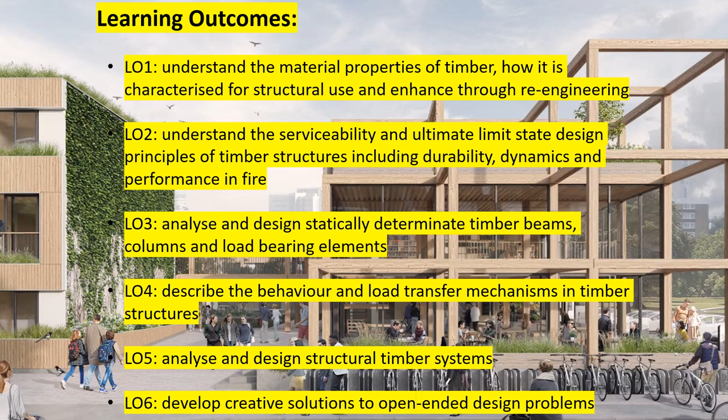Be capable of analysing and designing statically determinate beams, columns and load-bearing elements. Describe the behaviour and load transfer mechanisms in timber structures, and analyse and design structural timber systems, as well as develop creative solutions for open-ended design problems.

There's a full schedule in front of us. Please check your timetables if you are attending class with respect to where the room is. We have a range of individuals delivering over the course of the coming weeks. This module is normally team taught. In this instance, Bernardino is being replaced by Andrew Livingston for weeks 4 and 5, but fundamentally all the content will be covered.

We'll explore the different varying systems, connections, etc., and we'll also expand upon this through case study analysis. So it's a really intense but wide-ranging knowledge that you'll get from this with regards to timber engineering.

In terms of assessment, we normally have an exam as part of this, a coursework and exam, but what we're doing now is having 2 courseworks at 50% each. The first is on truss failure in week 8, and the second is a series of tailored questions distributed near the end of the schedule for you to undertake in your own time. Everyone will have questions tailored to them, so everyone will have different answers to provide.

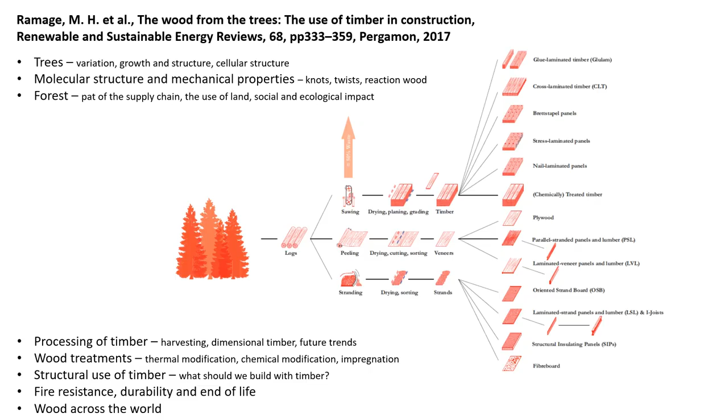So it provides a nice wide-reaching body of information. I would encourage you to read that, because it will help you understand timber as a resource through the course of this lecture and our course series.

There's a series of other publications available as well, including my most recent publication - or one of my most recent publications - the second edition of my book, published via TRADA, 'Offsite and Industrialised Timber Construction'.

And a lot of the content that populates this course will be extrapolated from that, so a useful textbook indeed. And of course, there's journal papers in the mix here as well, covering both timber engineering, but also things like collaborative frameworks to encourage the utilisation of timber.

A very recent publication, I think it's very timely, that's come out from the structural engineers is 'Can MMC Help Save the Planet?' Timber and natural materials are very much included in this. I would encourage you to download this publication, I understand it's free, and it looks at the impact of embodied energy and embodied carbon in delivery of the built environment, which is critical.

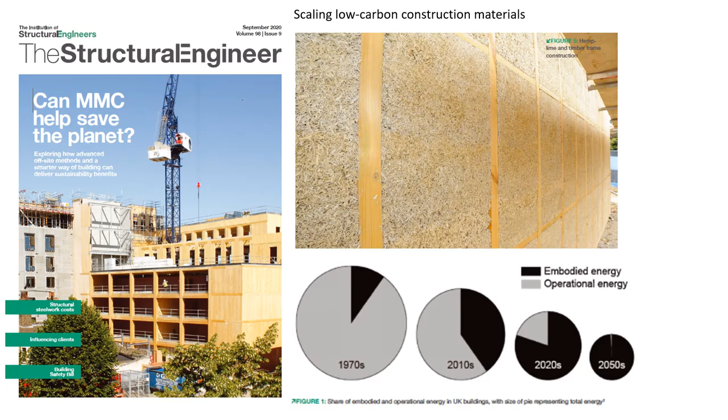Hence why timber engineering, or timber, needs to be scaled, because it's a naturally renewable resource. And that's going to become more and more important as buildings become more energy efficient, and actually the embodied energy of the building becomes more important in terms of its overall energy use during its lifespan. You can see how the pie chart has moved in that regard, and how going forward it's going to become more and more important that we use low embodied energy products such as timber.

I have my own paper that I collaborate on with other authors included in this publication, and it looks at the 5 capitals model for sustainability and how off-site construction can relate to that, with a particular emphasis on biogenic materials, so natural renewable resource, which of course timber is part of.

And just to cover off on that, to give you an understanding of some of the theories we're moving forward with, and why we should be using biogenic off-site manufactured approaches, is because fundamentally for the delivery of the built environment, and in order to have a sustainable future, we have to think very differently about how we achieve this. There's a theory out there from Forum for the Future around how to best achieve a sustainable future through system change. And fundamentally, that's what we need, is system change given the climate crisis.

So if we think about the 5 capitals model, rather than the current sort of capitalist consumption and productivity, it thinks more holistically about different capitals within the organisation, within the global organisation indeed, or even the organisation of Scotland. So we have to think about manufacturing capital, financial capital, social capital, human capital, and natural capital.

So manufacturing capital in terms of what's the products and processes that we're employing, financial capital, how does it impact upon the economy? What does this mean in terms of society and social cohesion? How does that influence the human capital in terms of skills and knowledge exchange within society? And how do we utilise natural capital for the delivery of what we want, and renewable natural capital for that basis, so that natural capital is replenishable, so that we're not undermining it for future generations.

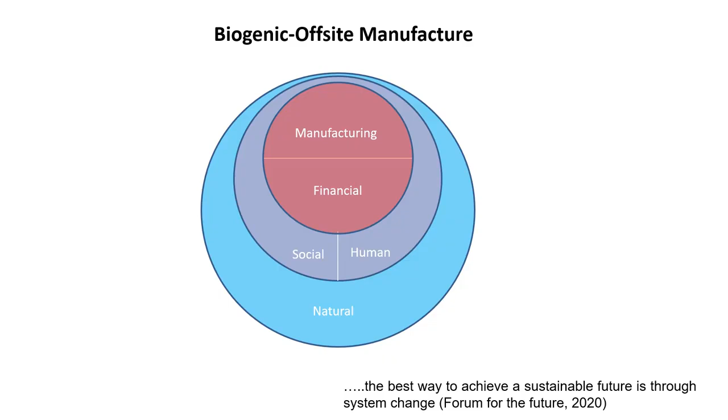Hence why, in terms of the delivery of the built environment, if we think about the utilisation of natural renewable resource, then timber is obviously a key component of that, and actually aligns with the necessity to deliver the built environment in a more environmentally sustainable fashion. So those are some of the theories that are explored within that paper, and I would encourage you to look at that and understand it, and correspondingly get a feel for why timber engineering is actually a very important subject matter going forward.

So in line with this, as I say, what we're concerned with in many aspects is the delivery of the built environment, and we've worked on a number of case study projects in this regard, and those you can see in front of you, ranging from domestic dwellings, bespoke one-offs, to the tallest timber building in Scotland, to the rollout of the Commonwealth Games Athletes Village, even the Dyson Institute of Engineering and Technology.

And some of these case studies will be explored during the course of the project to get an understanding of some of the work that we've done on the delivery of these. And of course, it's not all just focused on housing and residential. There's infrastructure, and there's other building typologies, and we'll start to look at those as well.

But fundamentally, it's about the built assets, how these built assets can be constructed and delivered for the delivery of the built environment.

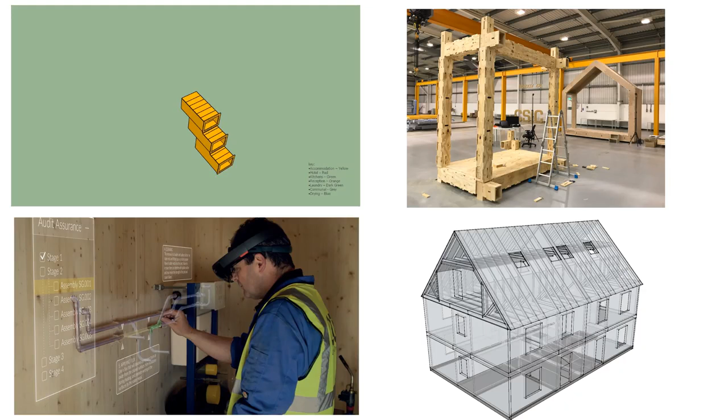More and more what we're also seeing is the built asset also has a digital asset, or digital twin. Digital twins can capture information with respect to that built asset, so you understand the most productive way of delivering it, what its carbon credentials are, what's necessary in terms of manufacturing capabilities to deliver that built asset, or indeed the structural properties or the low carbon energy and heating performance. That can all be built into the digital twin in order that you have fully informed design.

It's important to consider that, and we'll explore some of this during the course of the program that you're on, but fundamentally we'll be focusing on the timber engineering aspects. It's very important that these assets are digitally enabled, and structural engineering is a key component of that.

So I just wanted to give you a bit of context, but what I want to do now is give a bit of explanation in terms of who I am, what I do, and why I work, and the research work that I undertake or my team undertake feeds into timber engineering.

I run a research centre on offsite construction and innovative structures here at Edinburgh Napier, and we have a strategic objective to research, innovate, and commercialise construction technologies for tomorrow's communities, working in partnership with external stakeholders in the industry. We lead on fundamental and applied research for industry, government, and public sector bodies in the thematic area of industrialised building systems.

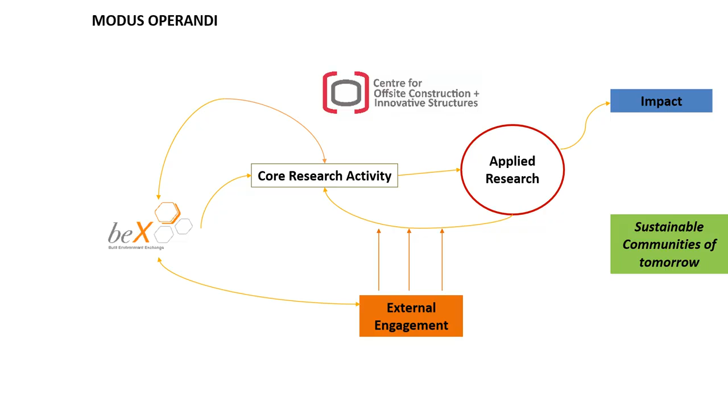Our work is very much about core research and applied research, working with the industry in order to create impact for the delivery of sustainable communities. We do external engagement with industry and wider stakeholders and often partner with them. Fundamentally, what we also do is underpin this through something called the Built Environment Exchange. If you're interested, you can look it up and see how you could get actively involved. What we're constantly doing is encouraging students to engage with industry through our research activities.

Just a brief overview of beX and what we're trying to do through this in order to change construction culture through collaborative research. Essentially it's a platform approach to accelerate change in culture and develop dynamic talent and deliver experiential learning. We provide opportunities in terms of internships, postgraduate scholarships, even employability on our projects, often wrapped around with augmented learning and student mentorship. If you want to find out more, please visit the website. It also creates a pipeline of talent to affect that cultural change.

Within the Built Environment Exchange, that mentorship piece is key, and we encourage students to go back into high schools and help with the delivery of design, engineering, construct, which can be delivered remotely, which is handy given the current climate. Ultimately, what we're trying to do is encourage international awareness, get our students internationally recognised, and develop a global mindset with our students.

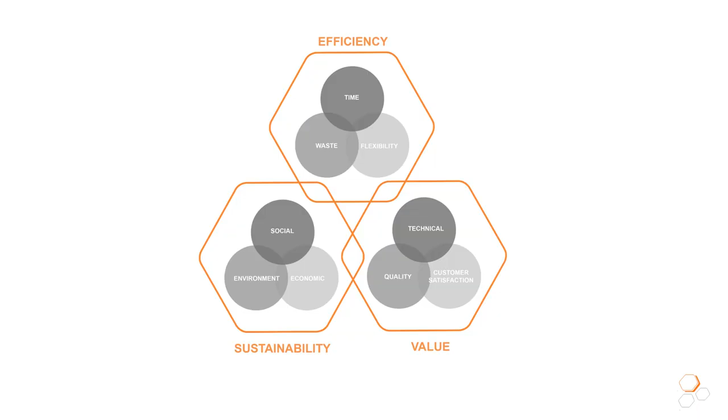And why are we doing this? Because we recognise that for the delivery of the future environment, we have to think about efficiency, sustainability, and value. So it's how we encourage that mindset into future generations in order that we can make a difference essentially.

In terms of the research centre itself and what we do, we work with the Innovation Centre, we work with industry partners, we create published outputs, and we also underpin the delivery of the built assets with our research. We also do outreach into the public to encourage the utilisation of timber and off-site construction approaches.

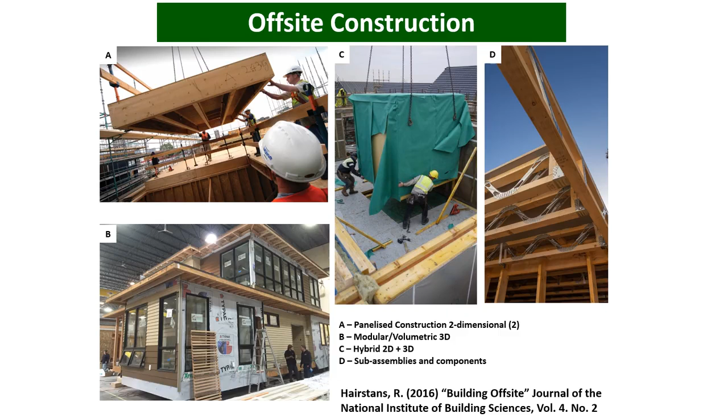So why off-site construction, or indeed what is off-site construction? Well, there's a range of products and systems that go from panelised to volumetric to hybrid to sub-assemblies, and information with respect to those is unpacked further in the publication listed.

There's a range of enhancement within those different segments. You can go from open panel all the way to fully enhanced closed panel systems, including windows and doors and insulation, or fully volumetric, including, if it's a bathroom plot, the sanitary ware, the pipes, the plumbing, or indeed the installation of the external lining and internal lining and external cladding.

Or it could even be the introduction of renewable options such as solar panels or heating systems.

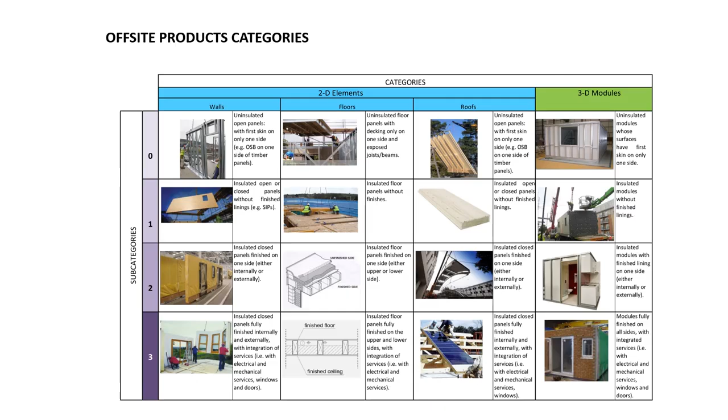And we have to think about the serviceability challenges with respect to that, i.e. the movement of the system when it's been lifted into position, because it can affect what's taking place, for example, if renewables are embedded in the system. So you don't want a disconnection to create a leak or a fire hazard or whatever it may be. So we have to think about the range of systems and correspondingly what was necessary for the design challenges of those.

With respect to off-site construction and timber off-site construction, it's been around for a long time. Medieval cruck frames were actually manufactured in the carpenter's yard in order to check them before they were then transported to site and erected. We had the Manning cottage, circa 1830, which was manufactured in England and then shipped to Australia as a result of the gold rush and a lack of skills.

We also have in the US the invention of platform frame as a result of mechanisation and sawmills and dimensional timber. But we also have Isambard Kingdom Brunel and the Renkioi Hospital, which was manufactured and shipped as a result of the Crimean War.

So offsite manufacturing has been around for quite some time, and indeed timber has traditionally always been utilised, in part because of its strength to weight ratio. It's relatively light, which facilitates shipping.

In the current context, these systems are still made in offsite environments such as cruck frames. Only now we use CNC machining, and beam and post type construction has moved on, and now we've got things like what's happening with robotic collaboration.

We've got Mjøstårnet in Norway, the tallest timber building at 18 stories, all timber construction using cross-laminated timber. And we're also using these digitised approaches, and there's companies even such as NorScot at the very top of Scotland and Wick using digital approaches for virtual reality and augmented reality.

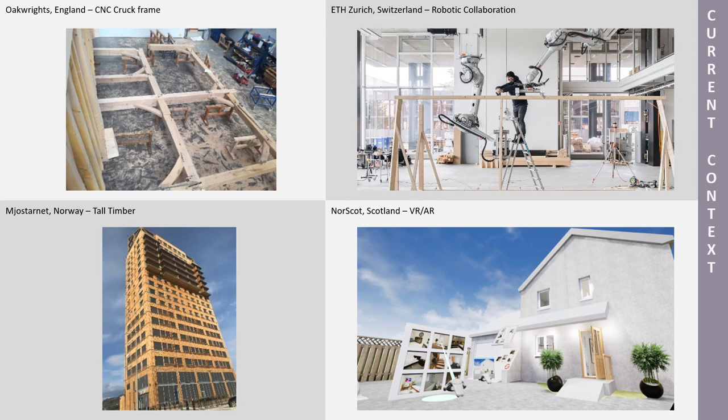So it's been around for a long time, but of course it's evolved, and the engineered timber products and systems have evolved as well, and we'll cover much of that within the course.

A key driver or key reason behind why offsite, why timber? Well, we have a ballooning urban population, so we need to deliver that, given, for example, things like the housing shortage. So we need to do that, but we need to do it in a sustainable manner. Construction productivity is stagnated relative to other sectors, so we want to increase construction productivity.

However, half of the non-renewable resources that mankind consumes are used in construction. So if we accelerate productivity, we accelerate the climate crisis. So we have to think again very seriously about the materials that we're utilising.

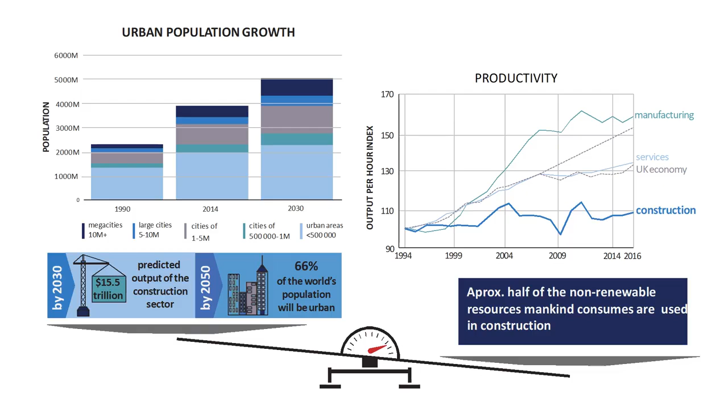So if we use timber within the offsite approach, given the necessity for productivity improvement, then we can sequestrate carbon in the built environment and actually start to reverse the climate crisis through the delivery of the built environment and carbon sequestration. Essentially locking up carbon in the built environment is good in order to achieve the sustainable development goals. So that's why we want to think about off-site construction using natural renewable resources and timber.

And in order to do this, we need to think in terms of sustainability, so the social, environmental and economic impacts. We need to think about value in terms of technical quality and customer satisfaction. We need to think about efficiency in terms of not just time, but also waste and flexibility. So how we can use standardized products for mass customization in order to meet customer needs. We want to think holistically about what we're doing in order to create optimization.

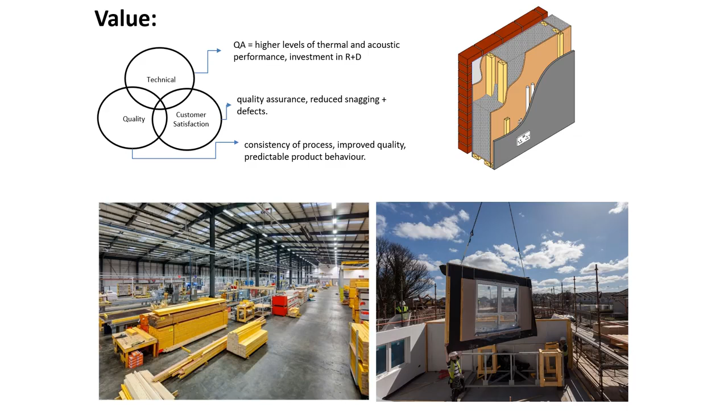So in terms of value, as I say, quality assurance, improved thermal and acoustic performance and R&D work. We want quality assurance, that factory environment, to reduce snagging on site. We want consistency of quality through the production processes and predictability of behaviour. So, for example, in a factory environment, you can control moisture content better, which is important with respect to timber.

In terms of efficiency, we can run activities concurrently on site and in the factory to get just-in-time happening and improve outputs and productivity. We have a product family architecture of standardised component parts for mass customization. So when you bring standard bits together, then you're going for mass customizable outputs. And we can use, as I say, what's happening in terms of the digitization space, computer design, computer manufacture to minimize waste and have waste reduction. So you can have 98% material yields within the factory environment.

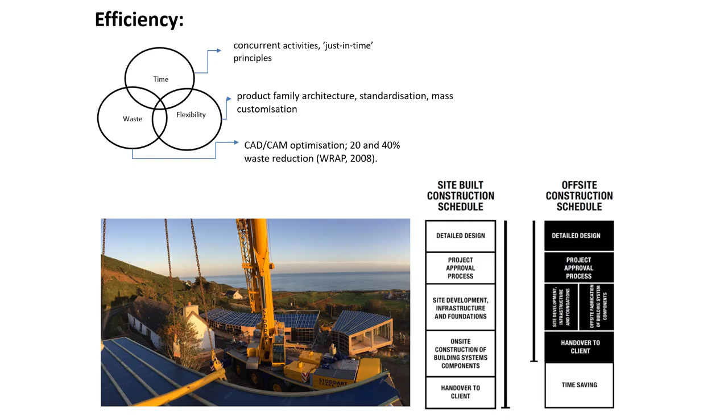And sustainability, so social, we need to improve construction culture. Factory offers clean, safe places of work. In terms of the economy, through a factory-based approach, we have local labour, local supply chains, creating economic viability. And of course, from an environmental perspective, we can think about efficiency, the qualified supply chain, so it's naturally renewable resource, and we can optimise and enhance overall performance. And we think about that through the whole value chain, from start of life to end of life.

And ideally, we think of that in terms of a circular approach. The type of work that we do in the research centre does actually cover a lot of this, but we also do a lot of work with respect to structure. I think a key thing here is we're thinking about structure and how we can use calculated analytical approaches, how we can validate that through test, and then utilise that within products and systems that we collaborate on in terms of research, such as hybrid service core products for social affordable housing.

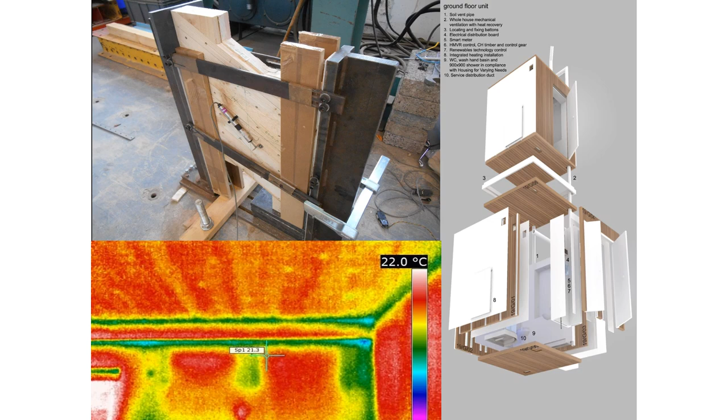But when we're doing this, we have to think about structure, but we also have to think about not just the wider supply chain issues, all the other stuff involved, but even how that impacts upon the final building envelope in terms of thermal performance and acoustic performance. So we have to think about things like thermal bridging. So we have to take a holistic design approach.

We do a lot of work, and this will be covered within the course, on mass timber products. So we're not just looking at panelised systems, volumetric systems, we're looking at the engineered timber products, including mass timber systems. So cross-laminated timber, nail laminated timber, dowel laminated timber, glue laminated timber. There's a range of mass timber products that we work on or have worked on and have continued to work on in order to have their place in the market. And again, some of this content.

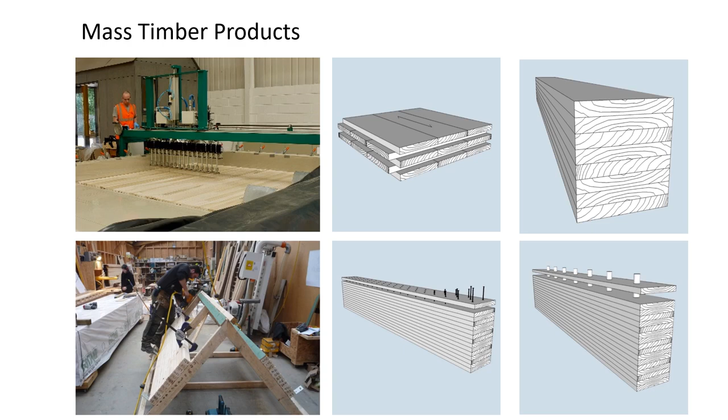So I would say that our current research activity sits within thematic areas of off-site productivity and capacity, human capital, skills and culture, mass timber construction and digitisation. It's not limited to these, but these seem to be the emphasis. But what it's primarily about is how we can encourage the use of contemporary timber technologies for the delivery of the built environment using a factory-based approach.

There's a whole raft of information that sits under why we need to move down this road, both in terms of offsite and the utilisation of renewable natural capital timber. So you can look through all of this in your own time, and there's much more than has been shown here to get an understanding of why we need to go down this road.

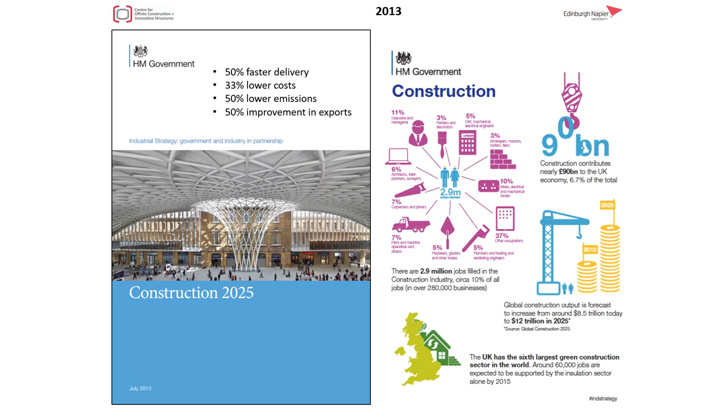So there is a lot of current context in this. There's been the relatively recent Farmer Review talking about the construction labour model: it needs to modernise or die. There's the industrial strategy work, Laying the Foundations, it's called. And then there's also Building a Safer Future in terms of building regulations and fire safety. And then there was recently the presumption in favour of off-site manufacturing via the House of Lords. So there's a lot of work that's pointing towards off-site construction.

There's a lot that's pointing towards the utilisation of timber, but at the same time, there are barriers to uptake, which we'll cover. In particular, reference to fire safety is a key one, given the combustible nature of timber. So there are barriers that have to be overcome in that respect, but certainly they can be, and there's an evidence base internationally to demonstrate this. It's just about taking the right approach.

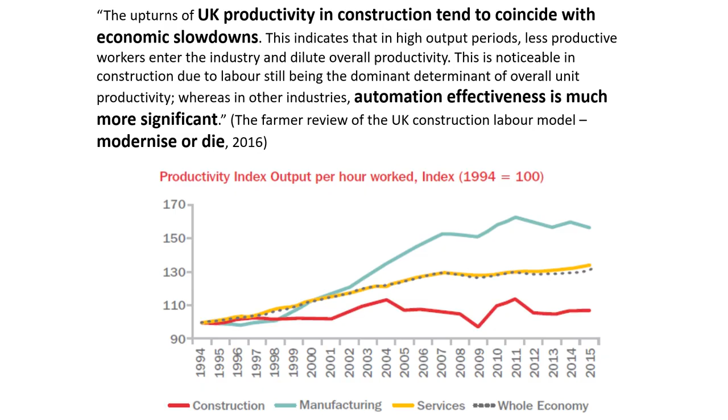So, as I mentioned before, productivity is key. Farmer highlighted this and the necessity for UK productivity in construction to change, hence the need for off-site construction. And as I mentioned before, not just thinking of this in delivery on a linear basis, but thinking of it in terms of a circular basis and a circular economy, and how we can maximise the value of our natural renewable resource in delivery of the built environment in line with circularity. And I would encourage you to look into these theories.

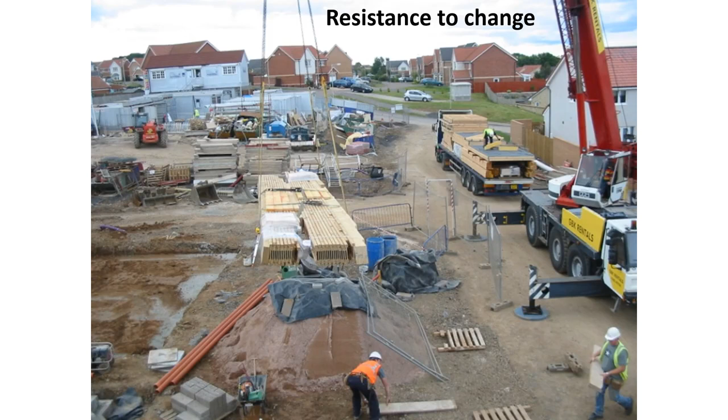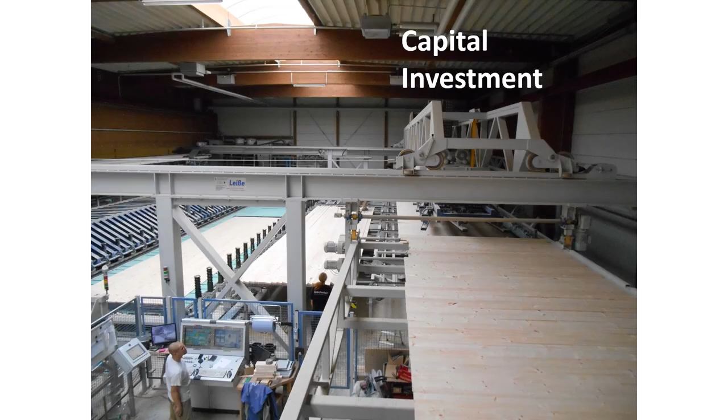However, when you move to a factory, you do need capital investment, so it's a different business model operation, and that has to be taken into cognizance when you think about the procurement model. What we're seeing here is a mass timber or cross-laminated timber plant, so you can see the size and types of equipment that need to be invested in for these approaches to be utilised. As I say, it's a change in business model approach. There's a necessity to partner early in order to maximise the value of off-site construction. If you come in and want to use timber off-site late in the day, you're not going to maximise the value proposition.

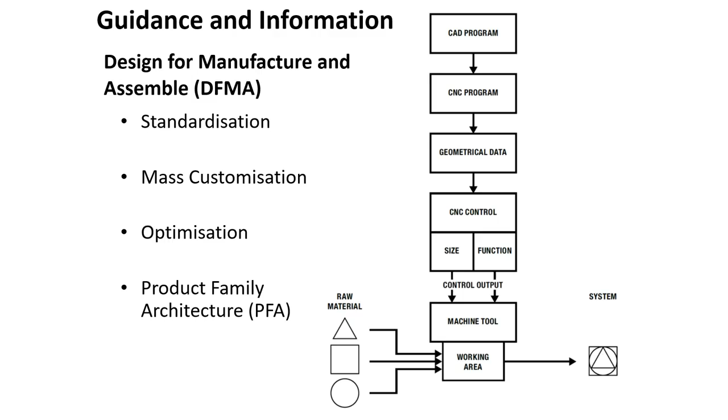There's a necessity for improved levels of guidance and information. I've given you a recommended reading list. There is a decent amount of content out there, but sometimes it's just explaining some of these terminologies: standardization, mass customization, optimization, product family architecture. What do these mean, and how do we need to understand them for future delivery?

So, we've unpacked a range of different things so far. Now, what I want to focus in on is if we think of current construction and a delivery model, then the drivers for construction delivery: sustainability, improved environmental credentials and the impact that can have, culture, the need for improved business models, the need for improvement in health and safety, the necessity for human capital, skills, collaboration and leadership within the sector, improved productivity, lean thinking and construction performance, digitization as we move towards the Internet of Things and the fourth industrial revolution, and regulatory drivers as well.

Even though Brexit has happened, we have taken on Eurocode and there's been harmonisation of that in terms of structure, but there are wider regulatory requirements as we move towards things such as net zero carbon. So if you think of these different drivers and how they can converge on a given context, whether a national context like the UK or Scotland, or the site context and what needs to be delivered, whether a one-off bespoke system or something rolled out with a degree of repetition, such as student accommodation, the convergence of these drivers points towards off-site construction. It's just what type of off-site approach: panelised, sub-assembly, volumetric or hybrid, and to what level of enhancement?

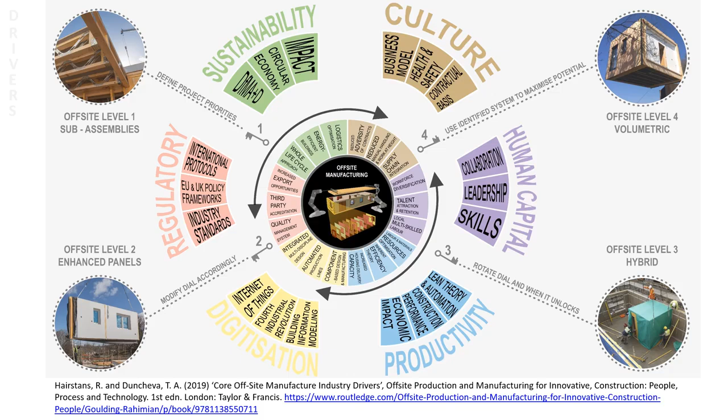But fundamentally, we shouldn't be delivering loose materials to site and subscribing to lowest cost, lowest quality forms of delivery that generate waste and have a huge impact on the environment in terms of the utilisation of non-renewable resources. So please think about this in terms of what you're looking to do and specify in the future. And I would suggest very strongly that it has to move down an off-site, industrialised timber technology approach.

So just to give you a sense of this and walk you through it as a wee bit of a learning journey, which we've done with students in the past, and we collaborated on this when we had Harvard Graduate School of Design students and our Built Environment Exchange students. They went on a learning journey in Scotland to understand these drivers and why we should be using off-site and

timber-based solutions. So in terms of human capital, we visited CCG in Glasgow, which was established in 2010 with a £12 million investment, and has year on year increased its turnover, its number of employees, and it produces panelised timber systems. So CCG are actually part of a wider collaboration in Scotland of Offsite Hub, or it was Offsite Hub at the time, which has now become Offsite Solutions Scotland.

And there's underpinning information with this in terms of how we worked with CCG to develop skills content for upskilling of apprenticeships, but also to create wider outreach into, for example, architectural practices. And we created a methodology for collaboration between different partners in the formation of Offsite Solutions Scotland. And there's publications that are available with respect to that.

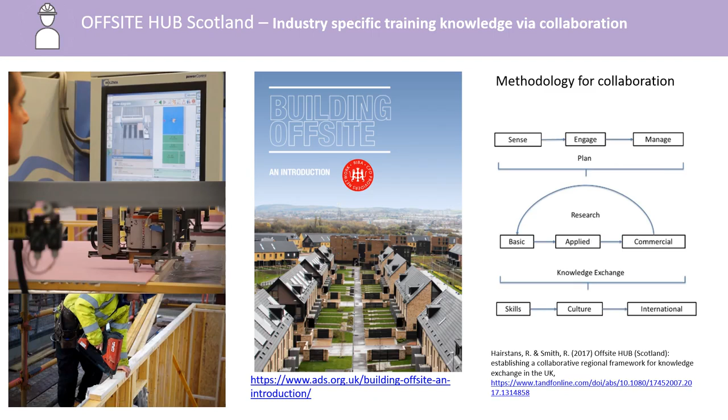The work undertaken by CCG is panelised solutions, and we've worked with them with respect to their fully enhanced panelised system. And when you move to fully enhanced systems and you think about the regulatory changes, you have to think about the connections and the transfer of shear through these connections. So we'll cover some of that over the course of the programme.

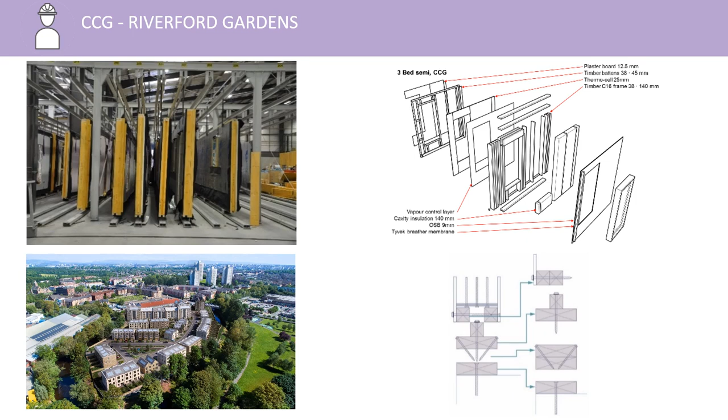So we've worked with them on this in order to evolve solutions, and those solutions have been utilised in live projects in terms of just standard housing delivery. But of course, there's 50,000 houses required in the term of this Parliament, the Scottish Government. So housing is a key deliverable.

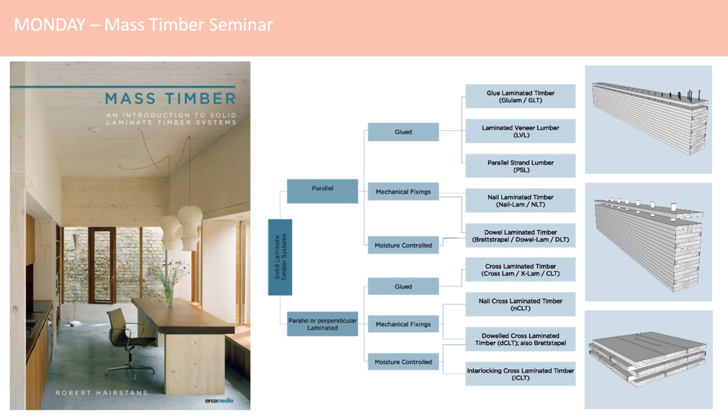In terms of regulations, we've worked with, again, CCG in this case, and I mentioned this before, the tallest timber building in Scotland, which is Yoker, and it's a CLT building. It's 8 stories. And we use mass timber product for the delivery of that in terms of cross-laminated timber. So we've unpacked this information, and this publication is available as well, which covers off a range of the different mass timber systems. And again, we will cover that during the course of the lecture series.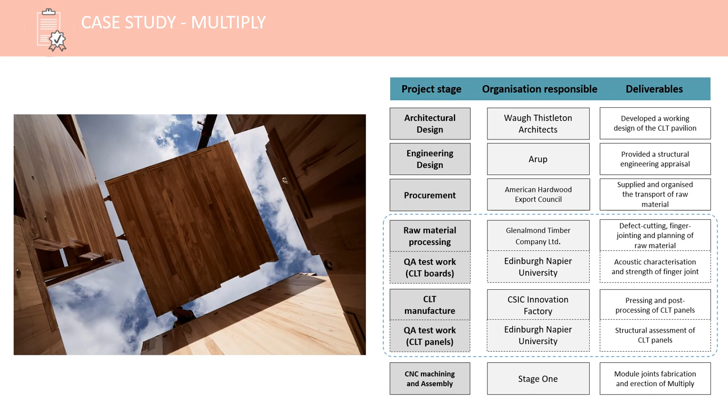And what we'll also do is look at some of the case studies that we've worked on, such as Multiply and our research and intervention, with a particular emphasis on quality assurance and how Multiply could be delivered. And Multiply was manufactured in Scotland at the Construction Scotland Innovation Centre. It used imported tulip wood from the east coast of America in partnership with the American Hardwood Export Council. And our role was largely around the quality assurance, as I said.

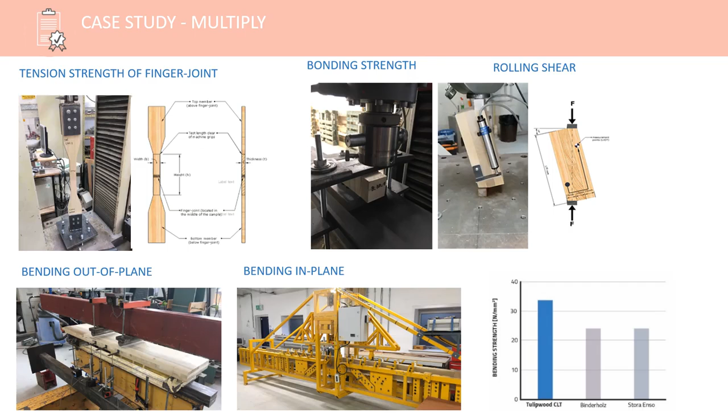So undertaking test work to demonstrate the structural performance of the different constituent parts in order to ensure it was safe for use. And this is Multiply at the V&A in London. It was a public exhibition. It resided outside there for a while, and then it got moved. It got assembled, but then it eventually got disassembled and actually moved and taken to the likes of Milan to showcase it there. And it was all about encouraging people to think differently about offsite and timber-based solutions.

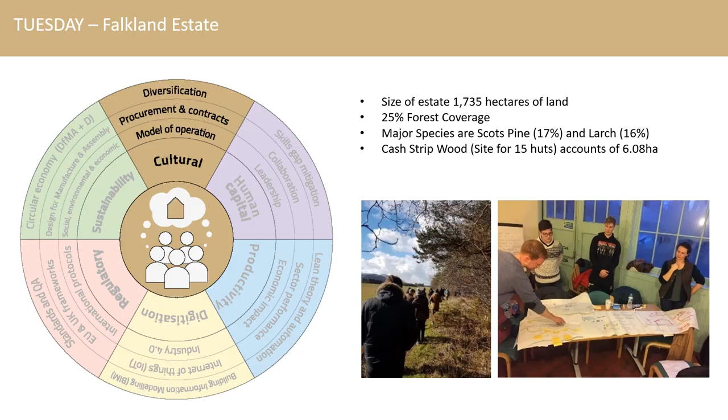Culture. Well, on the learning journey, actually, we went to Falkland. So Falkland's an interesting estate. It has renewable resource there in terms of timber material and Scots pine and larch, and there's a small wood there where they're looking to build off-grid recreational huts. So when we went there, it was all about, what is a recreational hut? It's a simple building used intermittently for recreational purposes.

It has a small floor area in order to get planning consent or relaxed planning consent, and it has to be constructed using low impact materials, again, such as timber, and built in such a way that it's removable with little or no trace. So again, aligned with the theories of circularity. So what we undertook for that was a design for manufacturing assembly exercise and indeed disassembly, and looked at how it could be fabricated using panelized systems in order to allow low skilled labour to erect it.

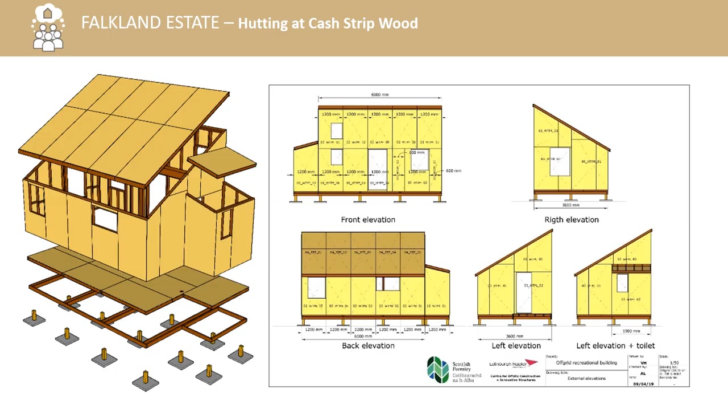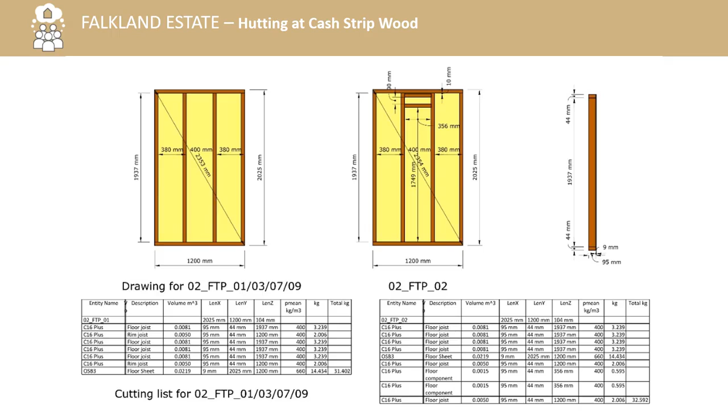So we used digital approaches to do that, and we're able to produce panel drawings with cutting lists and material specification to facilitate use. And importantly, thinking about what you can use the digital model for is to get the weight of each of the individual panels to allow for manual handling to take place. And you can see that's the nature of the hut there.

We also looked at sustainability in the learning journey. We visited BSW Timber, the largest sawmill in the UK. They have an annual turnover of 320 million, employing over 1,000 people, and they produce 3,462 cubic metres of timber per week. So quite a sizable operation.

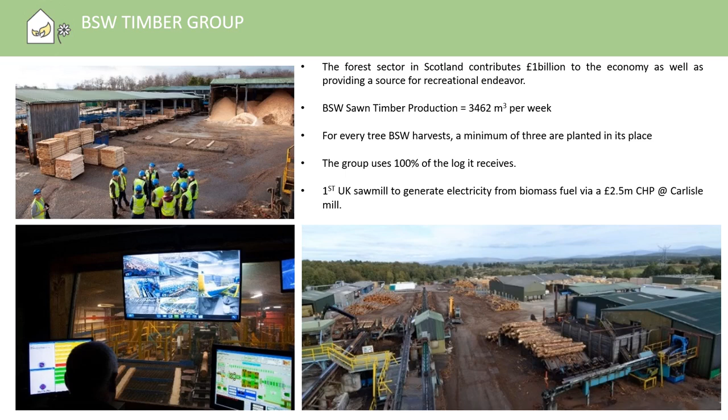We went there, and I think the key reason we went to BSW to explore sustainability is because as an operation they use 100% of the log that they receive. So they have a zero waste strategy, and that timber can go on to be turned into a structural component. Timber sucks carbon in from the atmosphere, so if we put it into a structural system, then you lock that carbon in for a longer period of time.

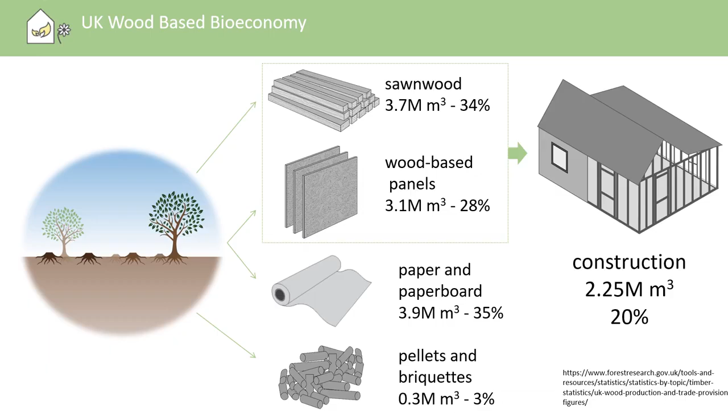A lot of the work we are doing around this in the bioeconomy is to try and enhance that type of approach—to enhance the level of UK timber products used within construction, to move it upwards from the current 20%. That aligns with the circular economy: maximising the value and ensuring waste reduction throughout the whole process, so that we can sequestrate carbon in the built environment.

A lot of the work done at ENU with respect to this is to think about timber grading properties. You'll cover this and understand better what is meant by structural grades of timber, and indeed why in Scotland a lot of our timber is stiffness limited. It's often graded at C16 as a result of how the yields work. You can get higher grades, but if you go for the higher grades you tend to create more waste—not waste in the sense it wouldn't be used for something, but not necessarily for the higher value activities.

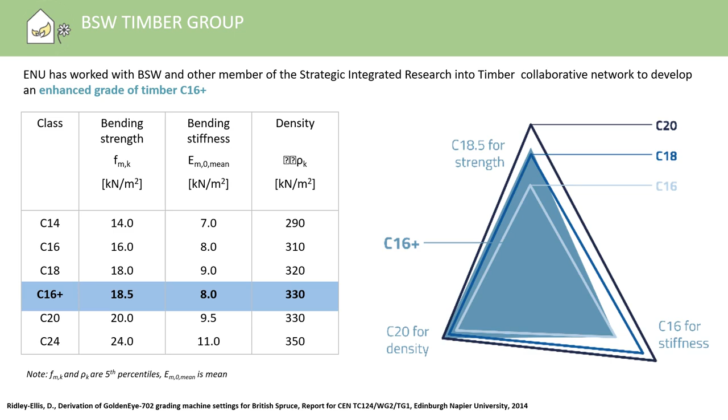Some of the work that colleagues have done in the Centre for Wood Science and Technology is to look at other grades, or how you can better utilise homegrown timber, and have determined a grade in terms of C16 plus, which better maximises the performance. The bending stiffness is equivalent to C16, but we have a higher strength and a higher density. That helps you structurally in terms of strength, but density also helps with connections, which we'll come to later.

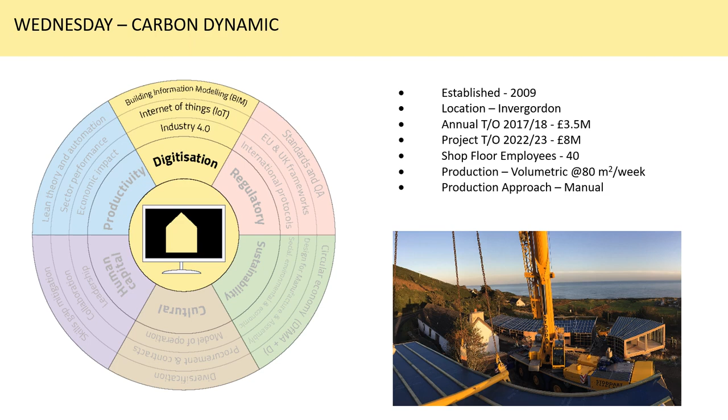I spoke about digitisation being very key, and to explore digitisation on this learning journey in Scotland, we visited Carbon Dynamic, a much smaller outfit, but they have invested a great deal in how to use digitisation within their product delivery. The Dyson Institute of Engineering and Technology, which we've seen a few times now in this digital image, was fully digitised to facilitate things.

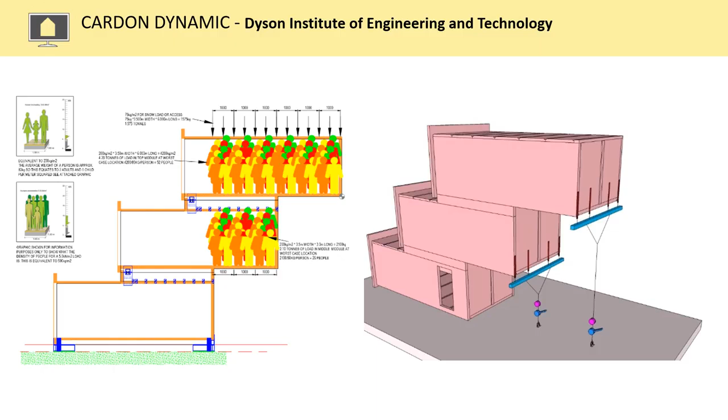They needed to understand how to structurally analyze it, because they were looking at quite ambitious cantilevers. So they had to model that, but we also had to structurally test it, using a series of strain gauges and dial gauges, applying load to the system in order to measure deflection under high loading conditions. That was the work that was done.

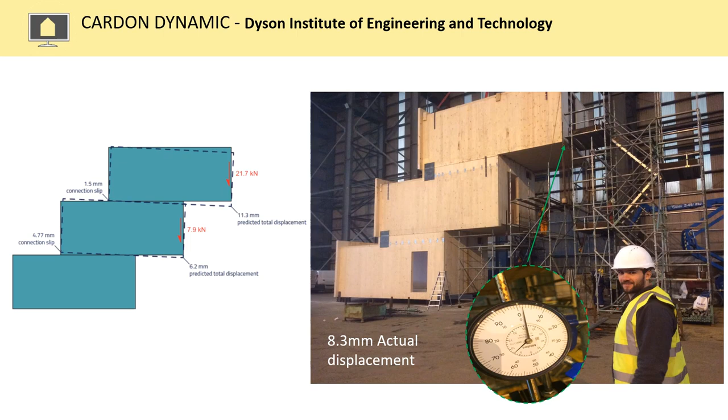Rory Doak, at the time employed here via the Built Environment Exchange, undertook that work. They built a mock-up of the system, tested it, and measured the deflection, correlating it with the structural model. So the structural model would be verified, and this would ultimately validate that approach—allowing the system to then be delivered, and delivered successfully.

Finally, to encapsulate all of this, consider productivity as a key driver—but thinking a bit differently about productivity. Often, if we just think about productivity in terms of outputs relative to inputs, what it can actually do is accelerate climate change. So we want to think about productivity differently. In Scotland, and indeed worldwide, we have a particular problem around vacant and derelict land sites, so thinking about productivity with respect to the productive use of land and how land could be used more productively.

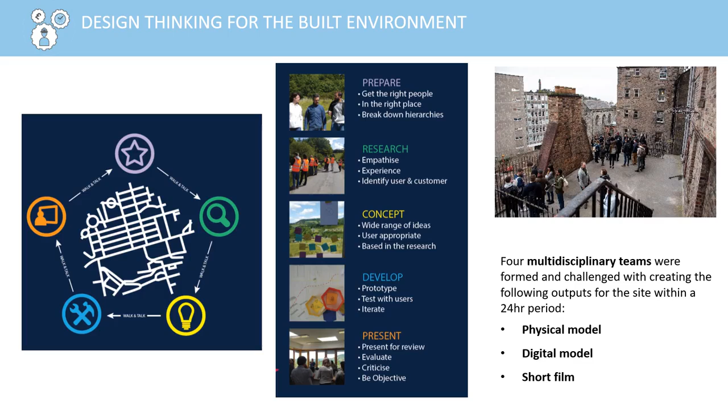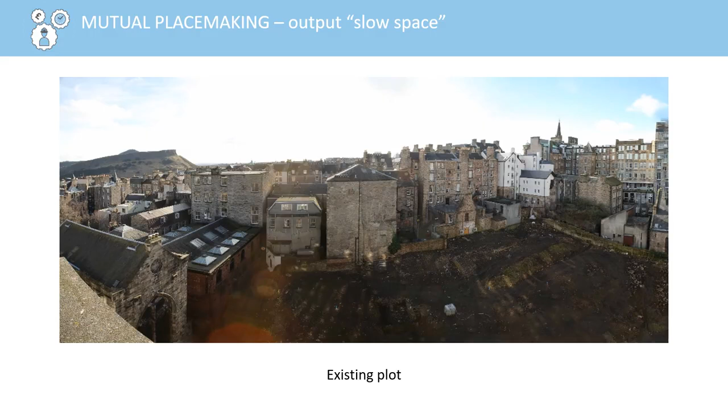So we actually undertook what we call a design thinking exercise with students from the Built Environment Exchange and Harvard students, and as a result of the learning journey and what they'd unpacked through this approach, we set them a challenge to deliver and take on a very vacant and derelict land site in the middle of Edinburgh.

Which is now possibly being converted, and to engage the local community to determine solutions. So the solutions they've derived are actually quite different from the solutions that are probably now being implemented, which is an extension of a hotel. But what the community were saying was actually we want community space, and then from the understanding of off-site and industrialised timber systems, solutions were derived which were compatible with the site. So it just gives you an emphasis of the type of work that was undertaken.

So just to unpack that, what we want to think about is sustainability. Industrialised timber construction can provide a clean tech solution for the delivery of the built environment. Culture, the built environment should be created in a manner which delivers sustainable communities and a wider cultural impact. Digitisation, a digital thread can be realised from forest floor to built asset with a feedback loop for continuous improvement.

Regulation should not drive innovation. Innovation should challenge regulation, and we're definitely seeing that. And productivity is not simply about increasing output relative to input. And then, of course, human capital is engaging with the consumer, can pull innovation through the process. So that's why, if we do that, then we can evolve the regulations as a result of what innovation is needed for the delivery of the built environment.

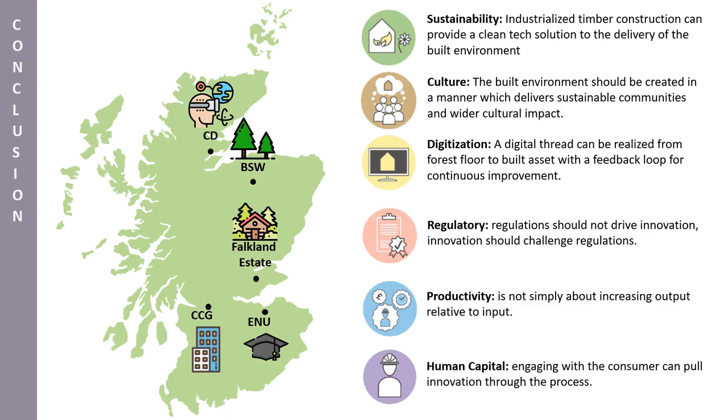So that was some of the conclusions that came from the learning journey. And if you want to find out more about this and learn more about the different products and systems, we did actually do a public exhibition, which is no longer at Architecture and Design Scotland at the Lighthouse, because that closed at the beginning of 2020. But the content is online at the link, and you can view much of the content, and it's also currently displayed at the Construction Scotland Innovation Centre.

So a lot of really good content there which you could look to explore to understand the varying theories behind this. So hopefully we've built the case. Often something I try and do when you guys will all be thinking about your research projects, but before you sort of determine what you're doing, it's an understanding of the full context of why you're doing it, and correspondingly justifying your approach.

So hopefully you've got from this at least a sense of the justification of why we need to use industrialised timber technologies and off-site construction systems. And then what we'll do through the course of the project is we'll meet those learning outcomes, and you'll receive lectures on a range of different information, and we'll just canter through some of that to give you a sense of what you'll be doing and thinking about.

So as a result of this, we will, for example, look at material properties. You will get an understanding of, to an extent, the molecular structure of timber and how the growth of timber and the introduction of defects influences its structural properties. What the impact is in terms of moisture content on timber and how that affects its design.

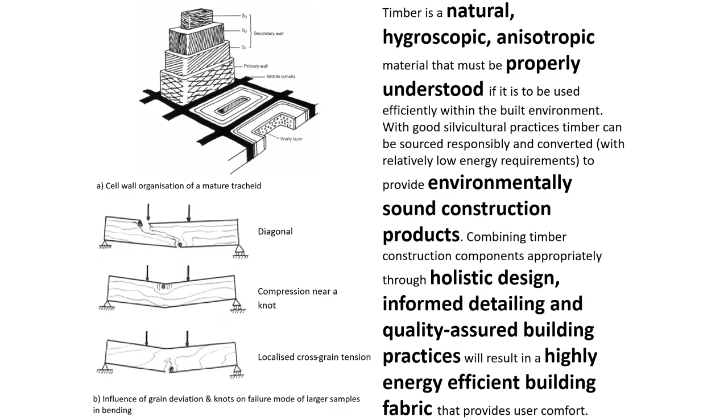So we have to think about holistic design and informed detailing and quality assured building practices within highly energy efficient building fabrics. But to do so, we fundamentally have to understand the materials. So those failure diagrams, they come from Bodig and Jayne, which I've encouraged you to look at, so you can get a full understanding of the resource and what impacts upon the resource, and indeed why we might want to re-engineer it. You'll get a full understanding of strength classes and why these are, or how these are contained in EN 338 and how they were utilised in structural design calculations.

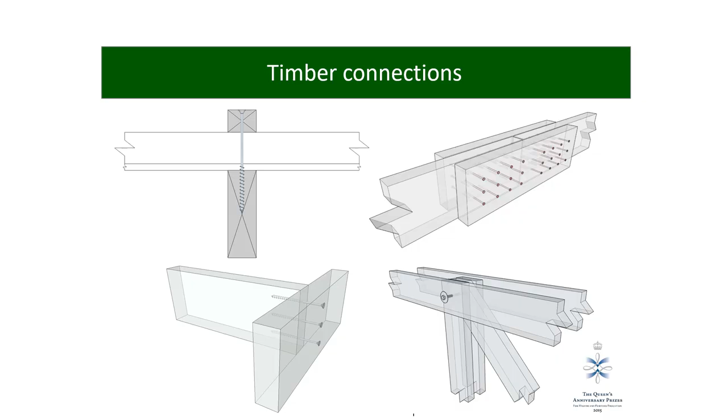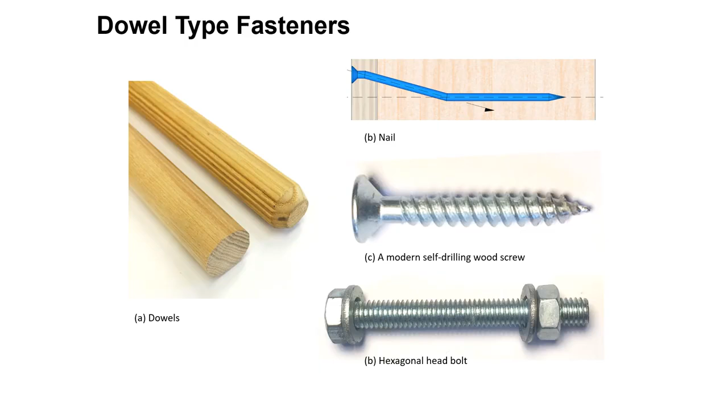And within that, we understand that the constituent parts, and often the weakest link in a timber structure, are the connections. So there's a whole range of connections out there. We will definitely touch upon a range of connections. You'll get an understanding of what makes up the connection. So in terms of varying dowel type fasteners, it can be screws, it can be nails, it can be bolts, it can be timber dowels, it can be plate type connections, both in terms of tooth nail plates or connector plates.

There's other interesting timber connection systems - split rings, shear plates, tooth plates - that are used for varying different applications. So you'll get an understanding of these. And of course, there's glued joints as well.

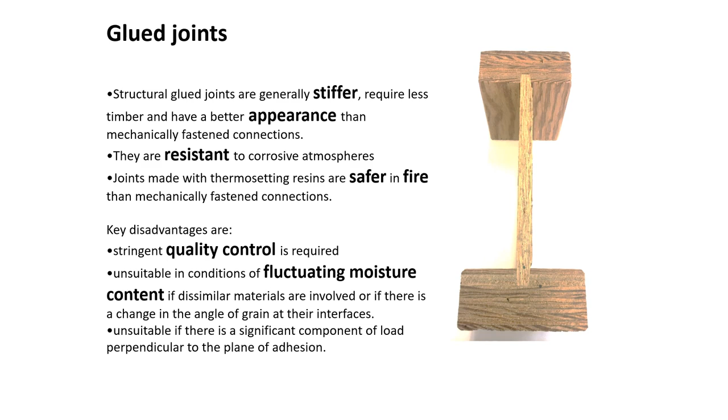Engineered timber products are made up of glued joints, or often made using glue. Not all the time, because there's nail laminated timber, dowel laminated timber, etc. But often glue is used for things such as I-joists, which often combine two different types of engineered timber products - oriented strand board for the web, and an engineered timber product such as laminated

veneer lumber for the flanges, and they're glued together. With respect to connections, we'll be looking at Eurocode design of dowel type fasteners. There's a whole range of connections, and how you design for them, thinking about the failure modes relative to the connection type, but also the dowel type used, and indeed the strength classification of the timber, because that will influence its density, and density influences

for example, the embedment strength of the timber product. So these will become clearer, and you'll get an insight into the calculation approaches for this as well. These are all mathematical calculations, and you'll understand the different factors to plug into these so you can understand the failure mode, which can then also lead you into how you can optimize that connection.

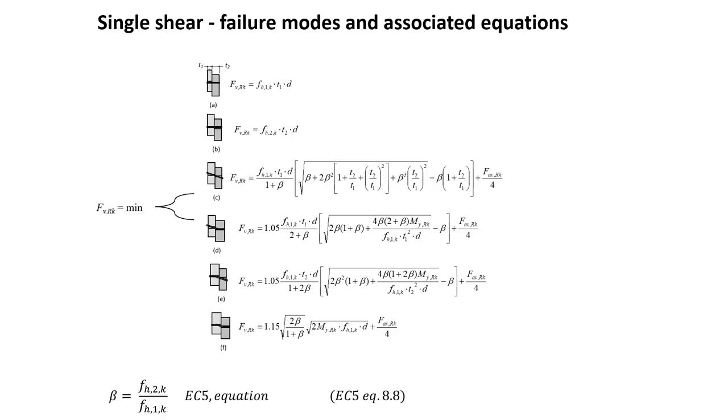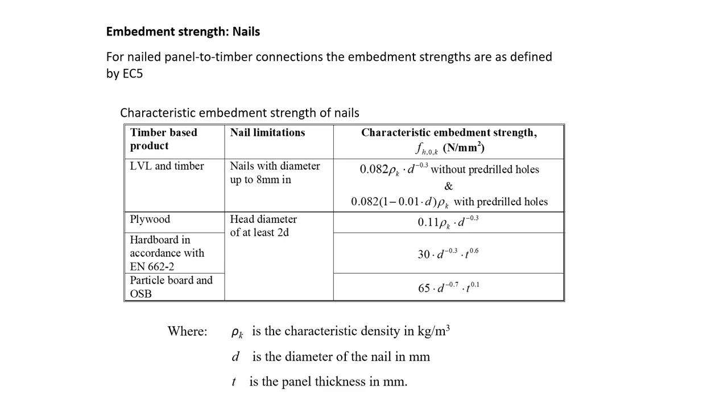Within these, there's things like embedment, which is affected by density, and there's empirical equations which allow you to determine that for the varying timber products and systems. So you'll get encouraged to look at this.

You'll look at the different failure modes and get an understanding of how each of the calculations reflect these failure modes. So here what we're seeing is embedment in the T1 timber, which will be as a result of its reduced thickness and possibly also its reduced density. So the different failure modes is what you'll run through, even when you're getting embedment in all three members, etc.

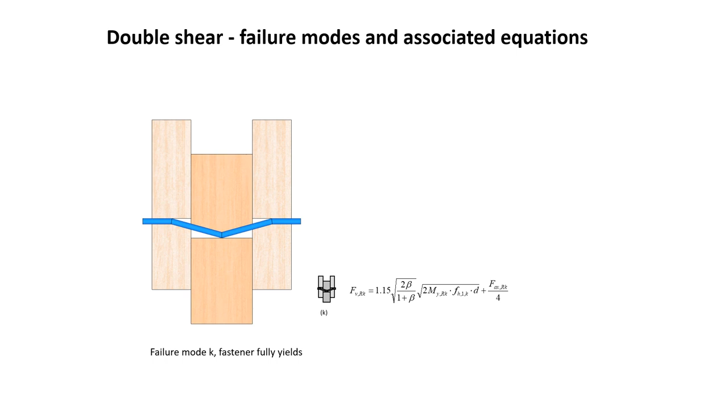So double shear failure modes and associated equations. You'll get a handle for these equations, and you'll be able to utilise them within the likes of your coursework.

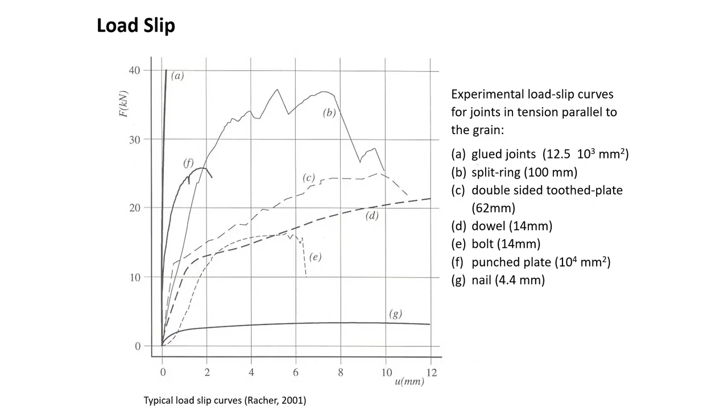That covers strength. We've also got to consider stiffness. Obviously a glued joint is highly stiff relative to a nailed joint, particularly if it's a single nailed joint. So there's a range of different stiffnesses of different connections that ultimately affect the serviceability criteria of your structure.

And you can determine the load slip behavior again through empirical equations. So a series of tests have obviously been undertaken, equations have been derived which are reflective of performance, and correspondingly you can plug in the information with regards to getting the information. So you either determine it via calculation, or indeed you could undertake the necessary test work to also get the values needed, particularly if it's a non-standard situation.

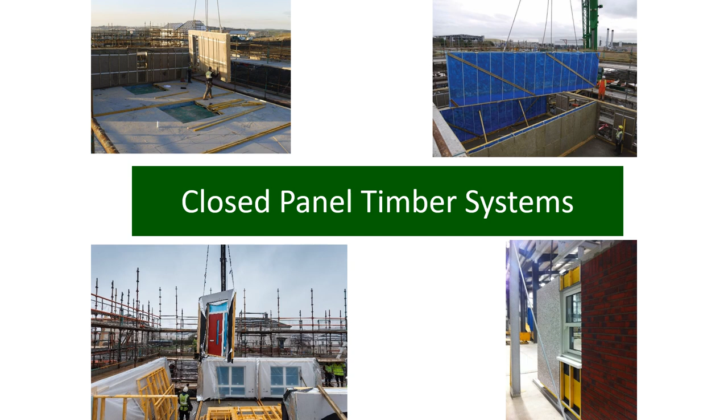So just explore upon that, and I've touched upon the likes of closed panel systems. As you move to do higher levels of enhancement in the factory environment, that therefore has an impact upon the installation process. So what you're seeing here, for example, is a fully enhanced panel. This is Stewart Milne Timber Systems Sigma 4.

I think the interesting thing to look at is the detail at the bottom and the relative connection details in there. Because when you think about racking performance or structural stability - again, this is something we'll cover in more detail later in the course - the application of those forces have to be transferred through the system and correspondingly into the foundations of the building.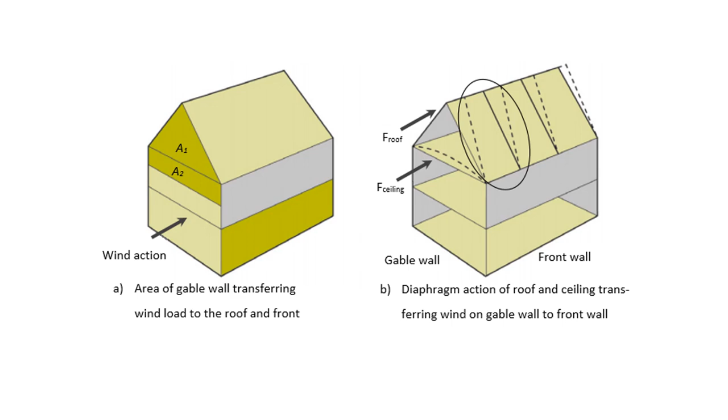So you'll be able to calculate the racking resistance, and the racking resistance is based upon the balance of moments. So you can look at these types of equations and check that they work. But essentially, the more holding down that you have at the foundation, more holding down straps that you specify, the more fixings that you have that will provide shear along the base.

And the more shear transfer that you have as a result of holding down, the enhanced level of performance that you'll get from the panel itself.

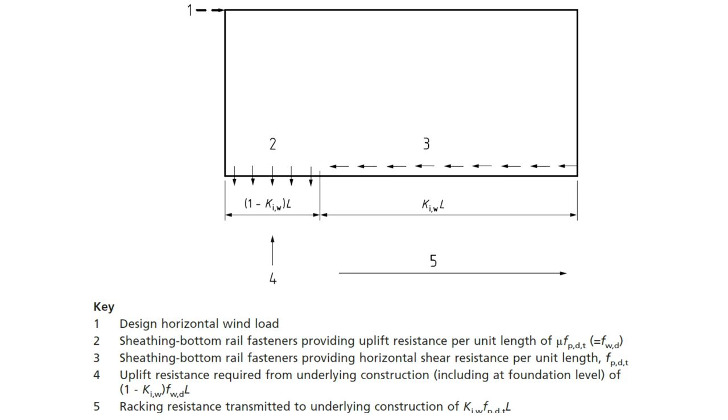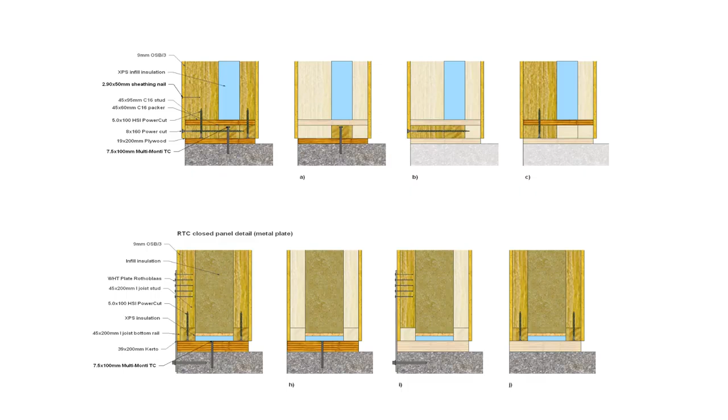But what you have to think about in terms of that shear transfer is the connectivity and the varying slip planes that are within there. So both in terms of structure and shear transfer, but also in terms of slippage of the system, given the necessity to think of serviceability. So there's a whole range of ways that you can actually do this. And when you're doing it, you're thinking about how you can reduce cold bridging, but at the same time get structural performance.

If this is relatively non-standard, you can undertake a series of test work. I often say you look at things in isolation to consider them in combination, so you can understand the full effects. Then you correlate that with the analytical approach, and correspondingly the test approach can validate the analytical approach such that you can make a robust specification.

So we've done that, and as you'll probably find out, we have an established relationship with Trimble. They've got software called Tekla Tedds, and we've embedded our research findings into that software. As a result of the university's engagement with Trimble, you have access to these softwares and will have the opportunity to use them.

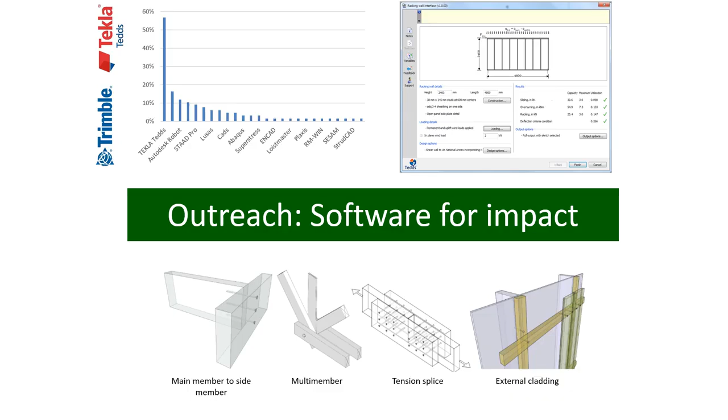But I think what's important as you're using them is to understand the underpinning approach. Because when you do design work, you get a design calculation to work, but what you also have to take cognizance of is that design detail is part of a much larger structural system. And there's a range of structural timber systems.

We've touched upon residential, but if you go to the Scottish Parliament, the roof structure is an engineered truss system using timber in combination with steel ties. You've got the likes of the Bullitt Building in Seattle, which is LEED excellent, one of the most sustainable buildings in the US, delivered using mass timber products including glulam timber because of the carbon sequestration details. You've got the England BSkyB building as well.

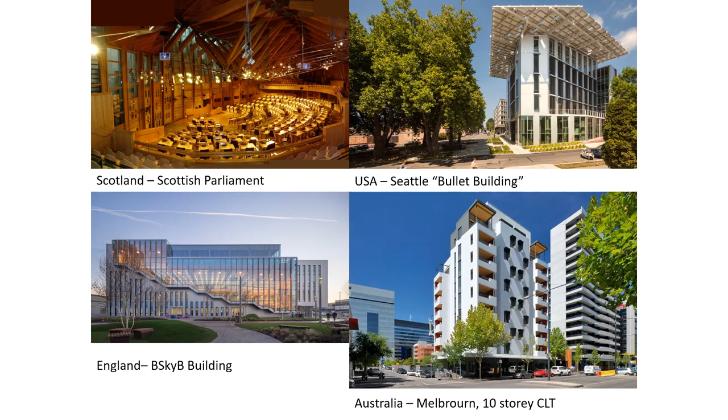You've got buildings at height around the globe going up as a result of things like mass timber and cross-laminated timber. But you also have interesting structures like grid shell structures. Buro Happold and now retired Richard Harris did a lot of research work on grid shell structures - really interesting systems that are all based upon the connection detailing.

We have our own grid shell structure at Craiglockhart, which we'd be encouraged to try and visit and think about the structural performance of that.

And recently, there's a multi-award winning Macallan distillery - let's combine two of my favourite things, which are whisky and timber engineering. There's a Macallan distillery in the north of Scotland using a grid shell timber structure, and interestingly, the constituent parts for the roof system were manufactured off-site.

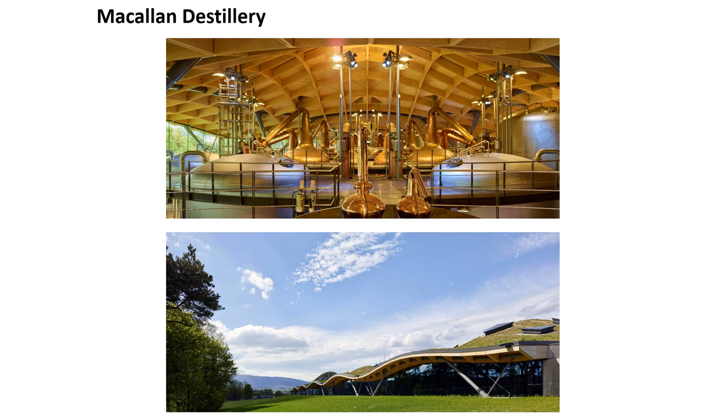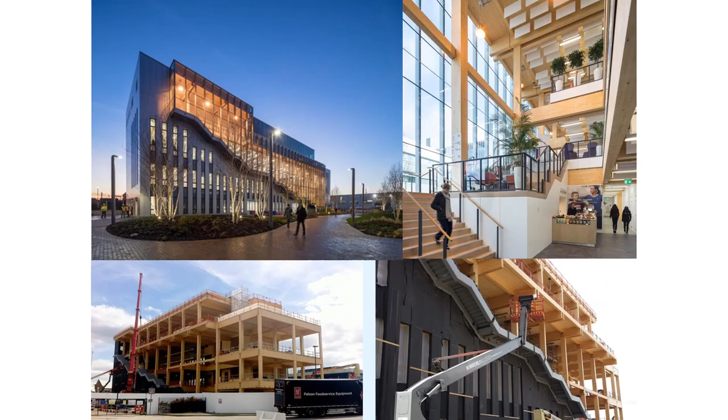And you can see the BSkyB building now exposed, and the range of timber products and systems used within that, including large off-site fabricated closed panel systems for the external walls.

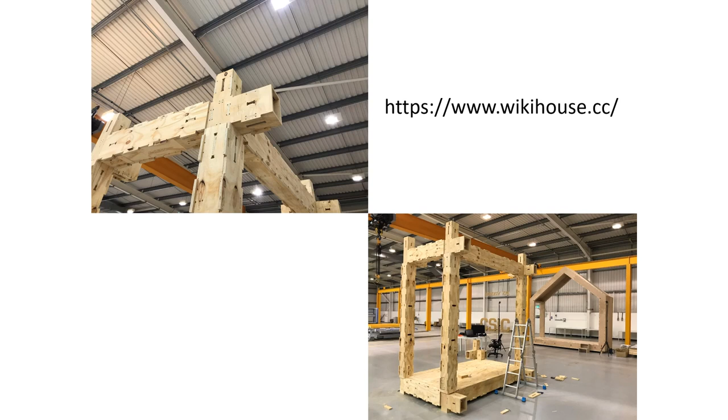Other really interesting things to look at are open sourced approaches to timber engineering, like WikiHouse. Preceding that, there's pioneering research done by Larry Sass at MIT around this, using digital approaches for mass customization given user input. WikiHouse uses a digital platform which you can design, and then fabricate out using CNC machining the shapes essentially, and then fit them together using a mallet hammer to create the connections between the holes cut in the plywood.

So there's a really interesting approach to that, and the Construction Scotland Innovation Centre have trialled this approach using some of their equipment. So I'd encourage you to look at that.

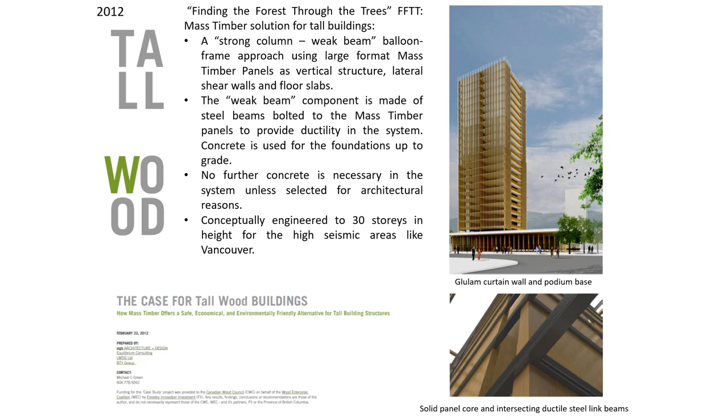A lot of work has been done on tall timber buildings, a lot of theoretical work done in 2012 and moving forward from that, essentially looking at how high you can go with timber built systems. Tall wood - this one is very much exploratory, and it throws up different challenges in terms of how you can achieve up to 30 stories using timber-based products, what that means, and indeed whether those products can currently be manufactured, and if not, what needs to be done such that they can.

We've seen Mjøstårnet, but it is currently the tallest timber building. So as much as the theory was looking towards 30 stories, we've hit 18, and these will go higher ultimately because of the techniques being deployed. It's an all timber built system to the extent that it's even timber cladded.

So as much as there's things happening in the UK as a result of Grenfell to create restrictions in height of combustible materials, which is going to impact the timber market, we're seeing a restriction at about 18 metres at the moment, which takes you to about 4 or 6 stories, and there's been talk of that reducing down to 11 metres, capping you between 2 and 4 stories.

In Europe, they're going up to 18 stories in Norway, and let's not forget that Grenfell had nothing to do with timber.

So it can evidently be done, and you can do it with what are regarded as combustible materials in terms of timber, because it can be safely designed, detailed, and implemented. However, a holistic design approach needs to be taken, and later on we'll explore some of the issues around fire and durability. But as they say, it can be done, and fundamentally we need to challenge what's happening at the moment in the UK.

And indeed it is being challenged. You can combine timber with other materials. In the Bullitt building I showed a brace frame, but timber flitch beams combine timber and steel, so you're trying to enhance the structural performance of the timber via the introduction of a steel component, but still have

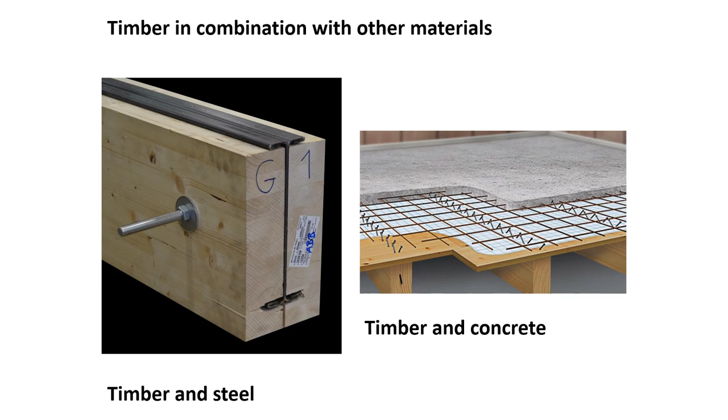So the building heats up, the concrete can store the heat, and then when the outside temperature or the sun goes away, it releases the heat back into the building. So there's advantages and disadvantages to think about in terms of the utilisation of material.

But fundamentally you can get to holistic solutions, and that's what they did at the University of Massachusetts, for example, in Amherst - a largely timber building, but they used timber concrete composites within the delivery of the flooring system.

Mechanisation - we'll look at roofing systems later on in the course. Mechanisation and automation is the work that's been done for delivery of roofing systems to improve productivity and reduce working at height, and that was some of my original PhD research.

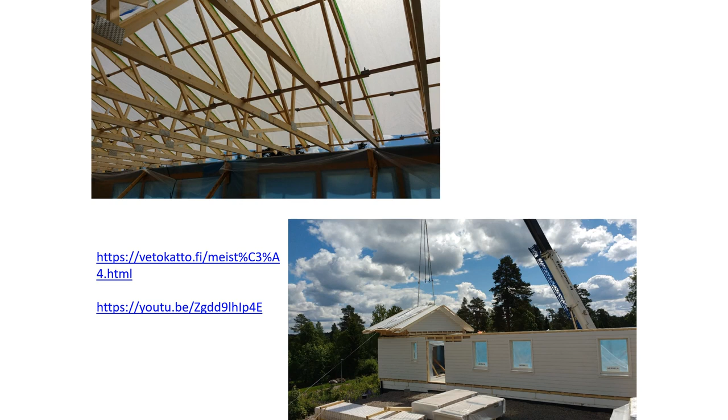But then there's really neat things that have been trialled by Vetokatto, where you land the roof in situ, and then like an accordion you pull it out using a motorised system. Now that all has challenges in terms of the structural detail, and some of the work we've undertaken is to address those challenges.

And then I mentioned, or you've seen some stuff at Zurich, really interesting to look at in terms of man working with machine, in terms of what we call sort of personalization. So it's really interesting to look at some of that.

And what's really interesting is how what's been undertaken starts to challenge what can currently be done through structural engineering, because you're able to create forms and structures which wouldn't necessarily normally have been achievable, because of how man and machine are working together. So really interesting to look at that.

So just to close off, as I know it's a bit of a canter through - what I wanted to really give you was an overview of the course, the justification for why we're doing it, what's the context we're working in, and what's the learning journey such that we'll go through during the course of this lecture series, so that you can develop a fundamental understanding of timber engineering. Timber engineering is very much on the upward trajectory, given the necessity to deliver the built environment more sustainably. That's absolutely key, so please do take cognizance of that and why this subject matter is very important.

But fundamentally, for sustainable design, we need to have holistic decision making to ensure longevity and robustness. We need it fully engineered for robustness, so that solutions last a long time and sequestrate carbon. And we need to give due consideration, with regards not just to the end built asset, but additionally the capabilities of the factory, the logistical operations, the design for manufacturing, assembly, and indeed disassembly, in order that it can be reconstituted and reutilised, to ensure that we maximise value consistently. And that therefore aligns with the theory and the paradigm of the circular economy and circularity, which is fundamentally necessary given the need for us to move towards a more five capitals model approach in terms of built environment delivery.